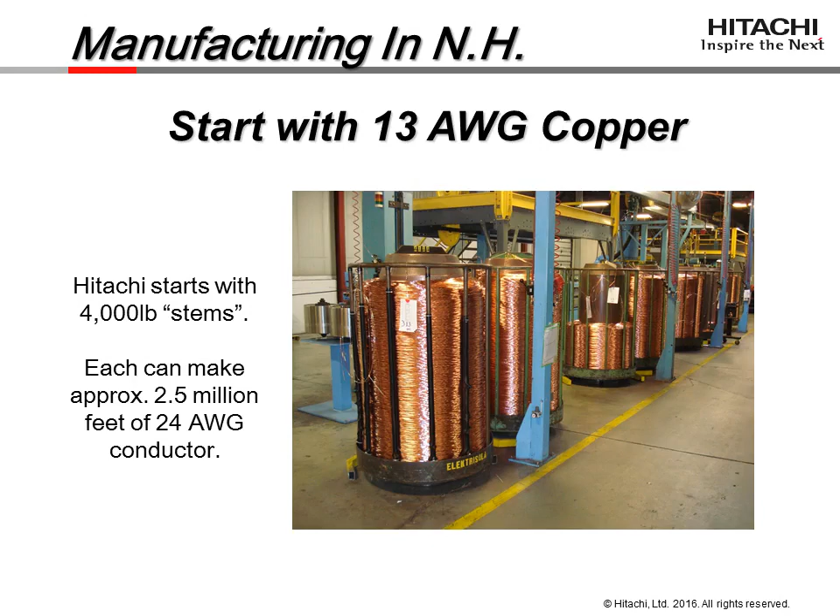North America. Stems are set side by side to allow a mechanical splice from the new stem to the stem running low. Once depleted, an empty stem is replaced with a full one. This allows non-stop manufacturing. Entering the drawing enclosure, the conductor wraps around a number of pulleys and through a number

of gauges. It is here that we draw the copper down from the 13 gauge to our desired gauge, such as 23 or 24 gauge.

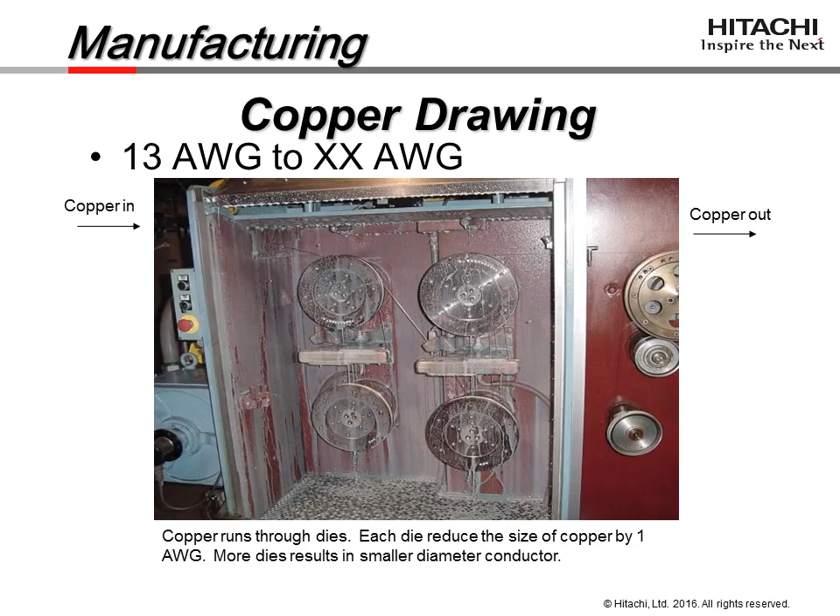Copper leaves the drawing process work hardened and susceptible to brittleness and cracking. Annealing makes the conductor workable and improves transmission performance.

Entering the annealing enclosure from the left, the copper goes into a chamber where a high voltage electrical charge is applied. The conductor exits the enclosure on the right side and goes immediately into the extruder for insulation.

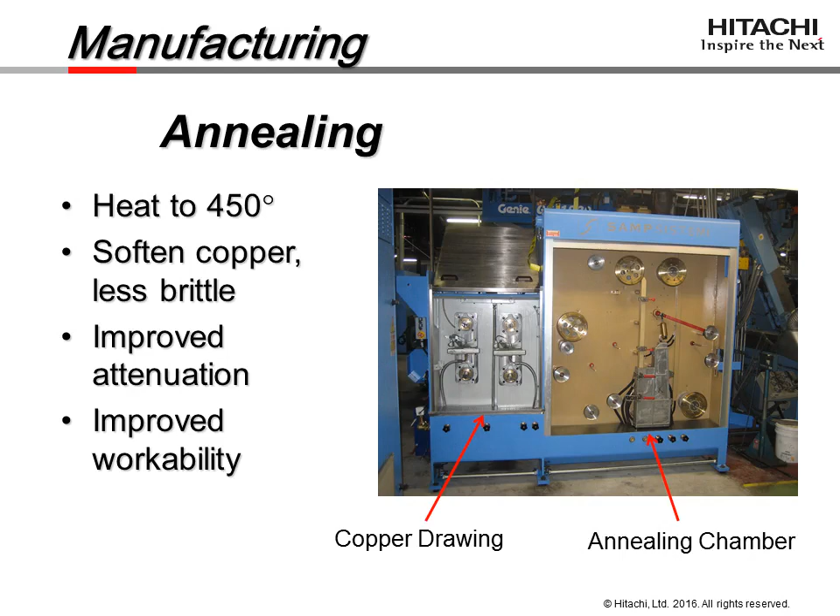Primary extrusion is where insulation is applied to the conductor. In this image, the insulated conductor is exiting the extruder head and traveling to the right. The cone of molten insulation that adheres to the conductor is visible at the center of the extruder head.

The temperature of the extruder head is dependent upon materials being used. Due to the different insulation materials used, conductors for plenum-rated cables usually process at 740 degrees Fahrenheit, while conductors for riser-rated cables usually process at 440 degrees Fahrenheit.

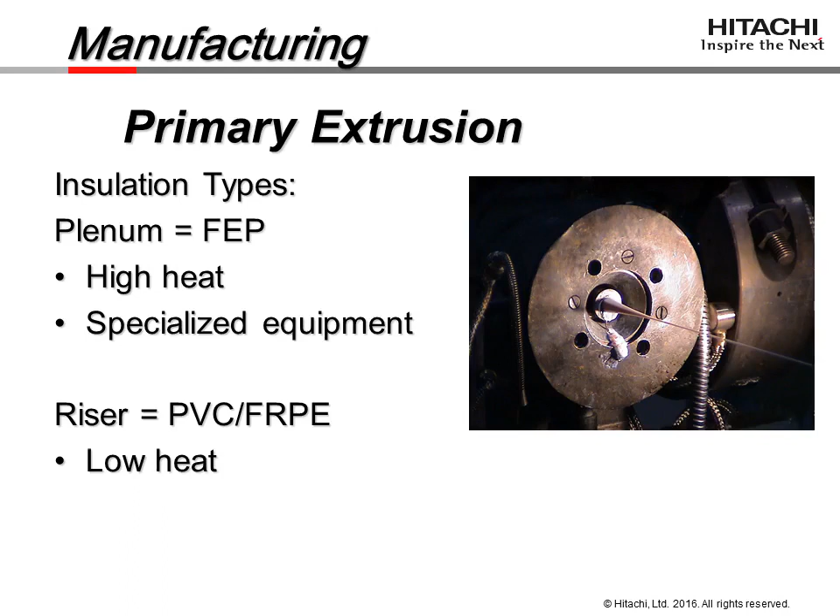Before being put on a reel, the insulated conductor is cooled with water. Maintaining control of the manufacturing process ensures products meet specifications.

The conductor must be round and smooth for the insulation to adhere to it. Eccentricity, or the centering of the conductor inside the insulation, plays an important role in cable performance.

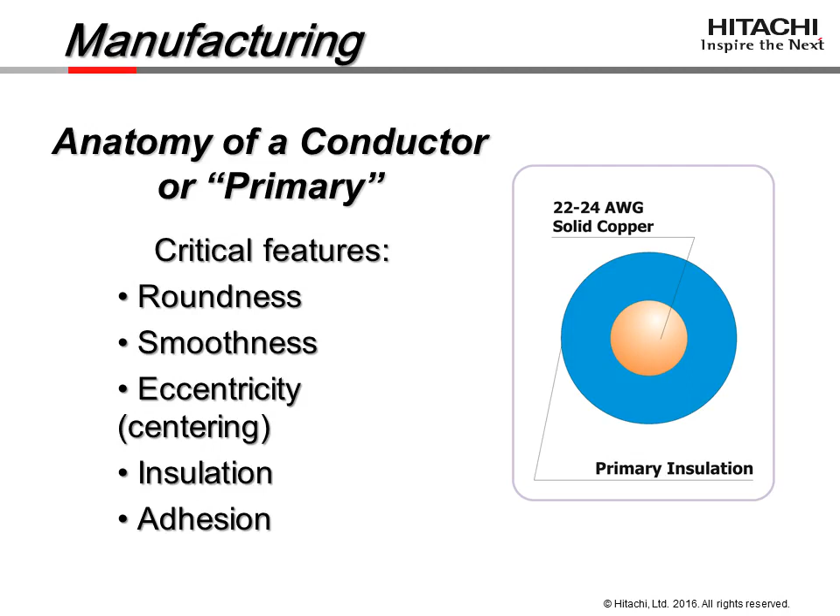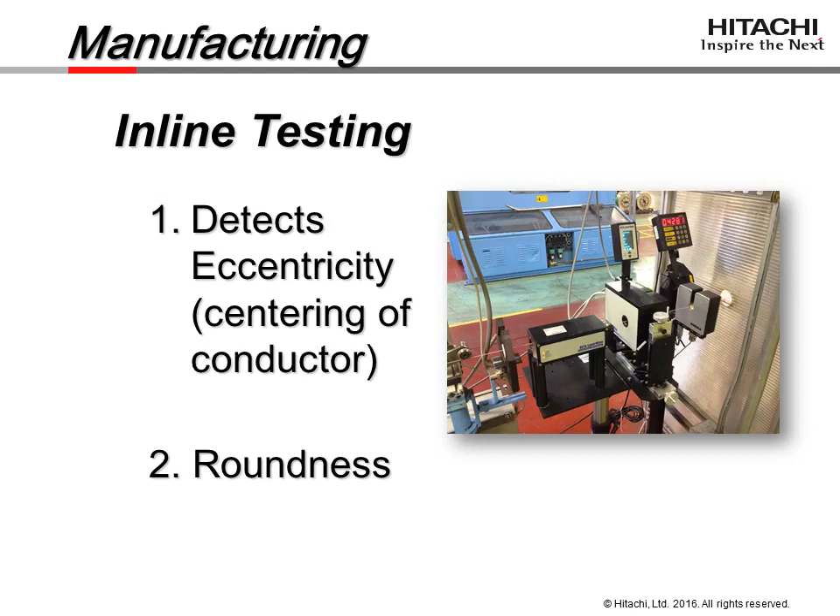Every foot of insulated conductor goes through a number of tests during manufacturing. But before we move to the next manufacturing step, we want to make certain all conductors are within specifications. Automated take-up reels enable non-stop manufacturing.

HCA has a variety of equipment to twist conductors into pairs. The cablers shown here twist conductors into pairs and pairs into a cable core. A center spline can be pulled in and a shield can be applied.

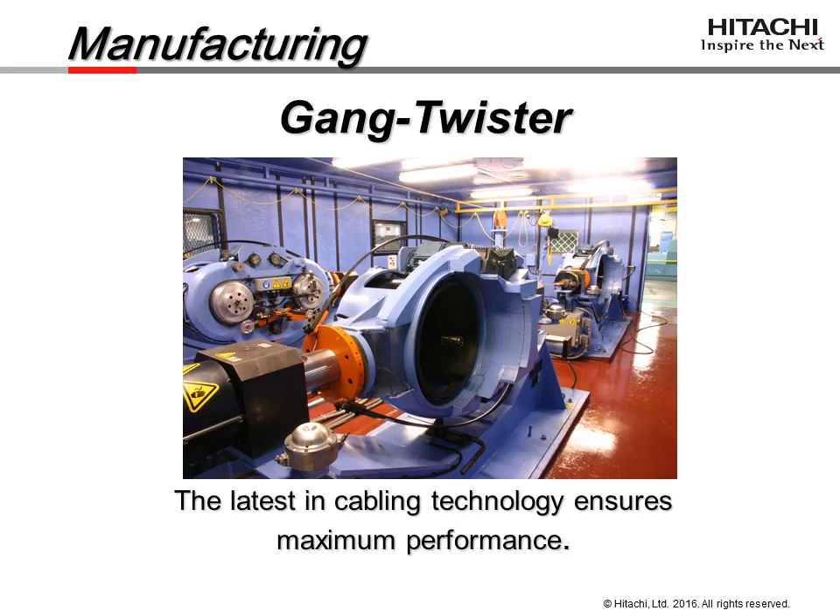From here, the cable core can go to jacketing. Here, cable core enters the extruder head, which is about 350 degrees Fahrenheit, and a yellow PVC jacket is applied.

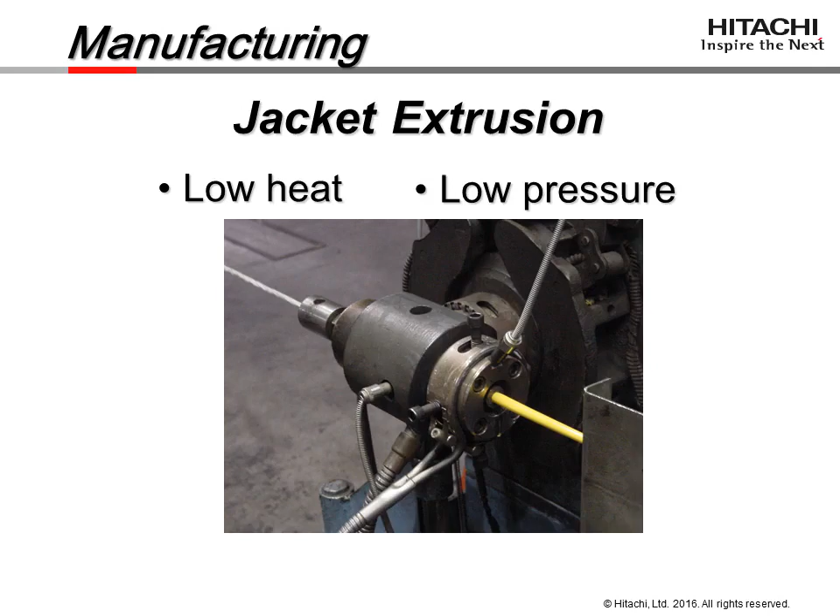The jacketed core then enters a water cooling trough before being taken up on a reel. It is worth noting that both plenum and riser-rated category cables typically have a PVC jacket. The material used for the plenum-rated cable, however, has more flame retardant in it.

Cables are manufactured in lots that consist of multiple cable reels. Test samples are pulled from reels throughout the lot to ensure product consistency.

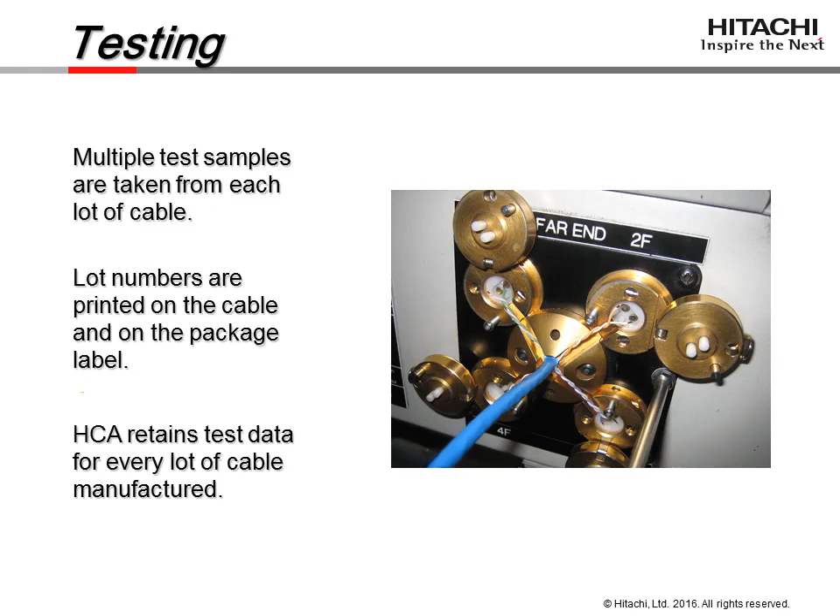After jacketing, the reels are sent to respool where print legend is applied and the cable is cut to 1,000-foot samples and packaged. The most popular form of packaging is the ReelEx box.

HCA boxes are some of the most durable on the market, and each box has a conduit fill chart printed on it to aid in installation.

Quiz time. Number 1: HCA manufactures in what U.S. state? Number 2: What gauge conductor do we start with? Number 3: Does annealing make copper softer or harder?

Number 4: Water is used to clean the insulated conductor before it goes on a reel. True or false? Number 5: Eccentricity refers to the centering of the conductor inside the insulation. True or false?

Number 6: Jacket material for indoor category cables is usually PVC. True or false? Number 7: Only one test is performed to a lot of cables to help expedite manufacturing. True or false?

Number 8: Reverse sequential footage are printed where? Number 9: What is printed on the box to help when pulling through conduit? Number 10: It's okay to stack pallets of boxed cable.